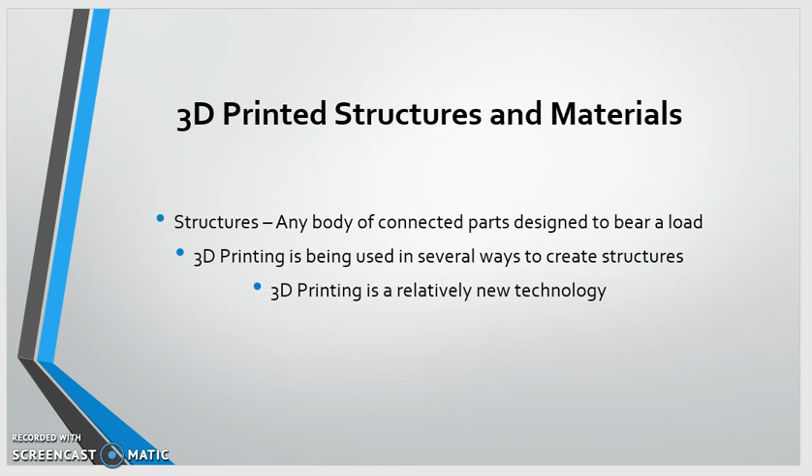The topic we have chosen to detail through research is advances in 3D printed structures and materials. In this report, you will learn about several different ways existing additive manufacturing processes are being used to create structures. 3D printing is a fairly new technology compared to traditional manufacturing techniques, but access to technology has allowed this field to grow rapidly in comparison.

In order to talk about how advanced printing of structures is accomplished and what materials are being used, it's important to define how traditional printing is accomplished. A design is made, processed into a file format handled by a printer, and printed using processes such as selective laser sintering or fused deposition modeling. The main constraint of these technologies is that in most cases it's confined to the inside of a relatively small printing machine, which limits the size of what can actually be made.

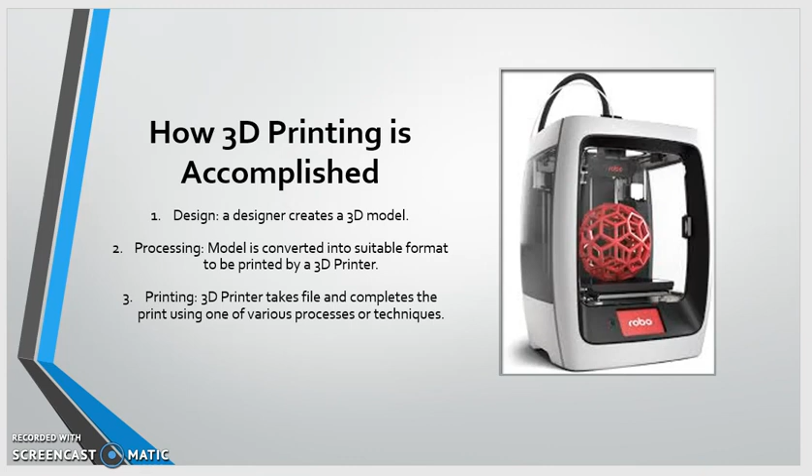To highlight advances in 3D printing and the materials used in their processes, we looked at three examples of where 3D printing is being used to create structures, each with different materials. The first deals with metal structures, the second with concrete structures, and the third with polymer-based structures.

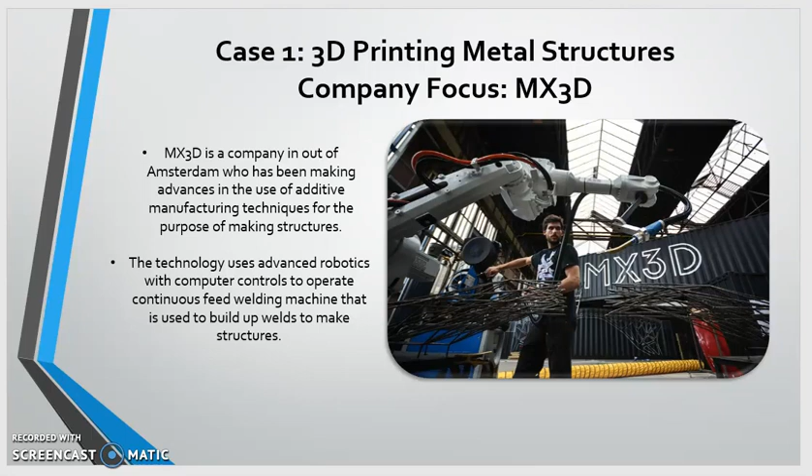In case 1, we researched a company called MX3D out of Amsterdam. They have made huge advances in additive manufacturing through advanced robotics with integrated computer controls to operate a steady feed welding machine that continually builds up welds to create 3D load-bearing structures. Their major project is the construction of a bridge spanning a 12-meter gap across a canal in Amsterdam, pictured above. One notable observation is that the geometry of what they're able to print is almost organic in form, a departure from traditional I-beam construction.

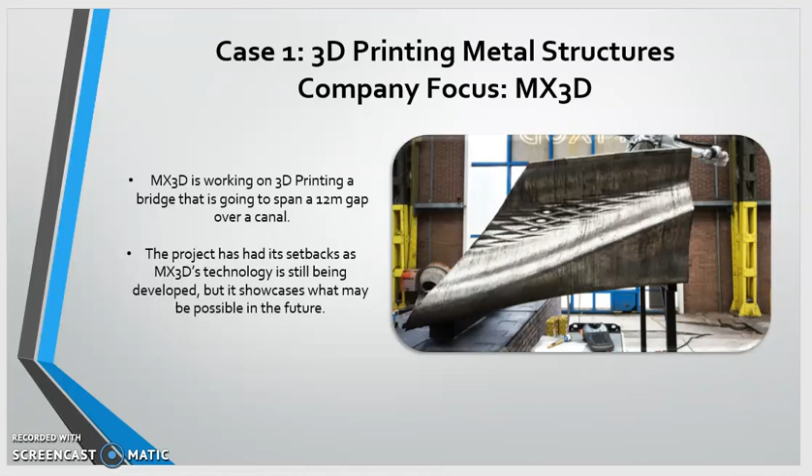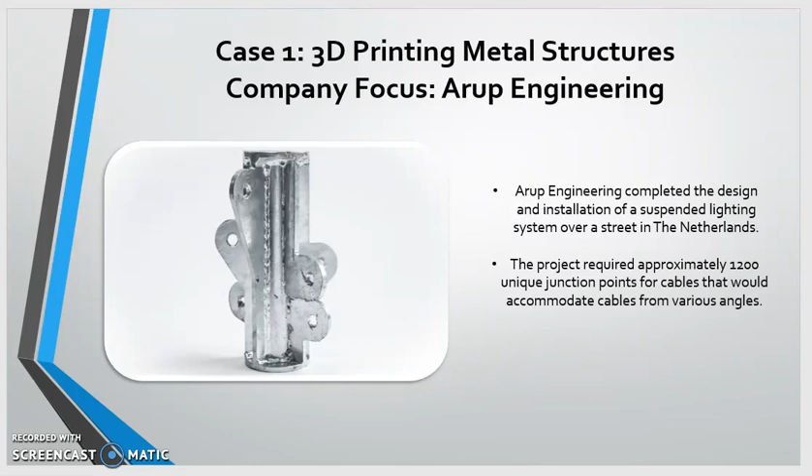Another case of metal being used in new ways in the printing process can be seen in a research paper by Arup Engineering. Arup completed the design and installation of a suspended lighting system over a busy outdoor shopping center. Numerous cables were used to hang lighting structures, requiring 1,600 cable junctions, 1,200 of which had slightly different dimensions to accommodate cables at different angles. Arup investigated how 3D printing could streamline the creation of these 1,200 unique junction points.

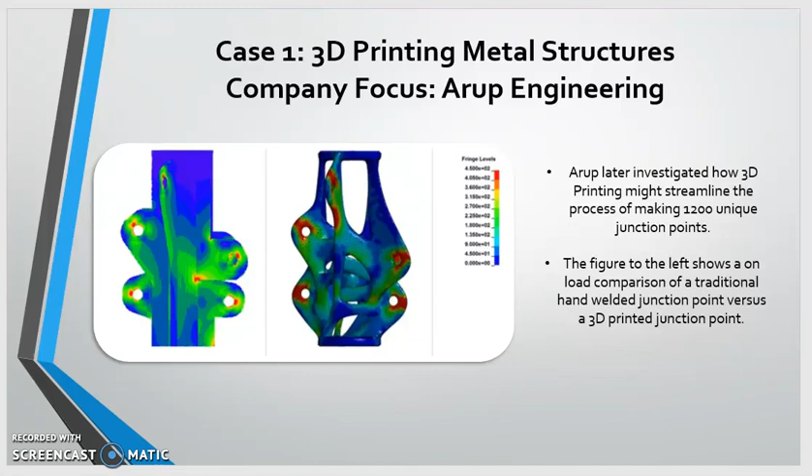They found that an additive manufacturing process, in this case selective laser sintering, could be used to create these junction points, as an alternative to welding them by hand. This also allowed them to depart from traditional geometries, as seen with MX3D, dramatically reducing the material needed for components while maintaining structural integrity. Again, the designs lend to a more organic form than we're accustomed to seeing. The accompanying figure shows a load comparison of the traditional junction point versus the proposed 3D printed version, both sufficient for the job.

What Arup found was that through the use of additive manufacturing, they would be able to create these pieces. However, the cost saved on labor at the time would not offset the high cost of 3D printing, so it was not truly a viable alternative.

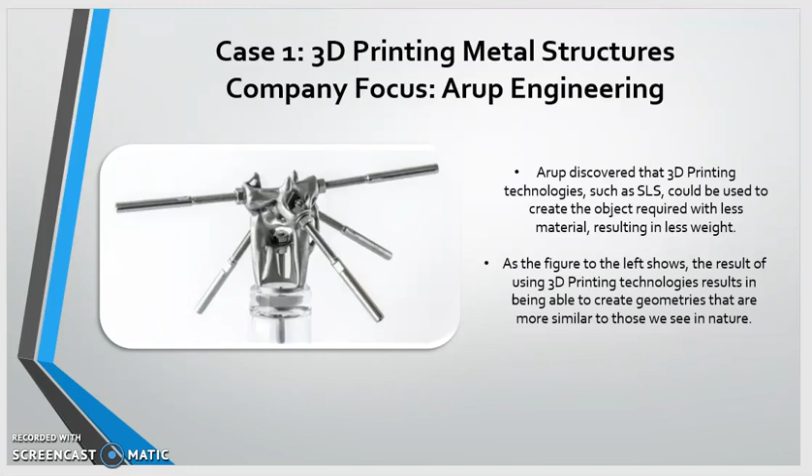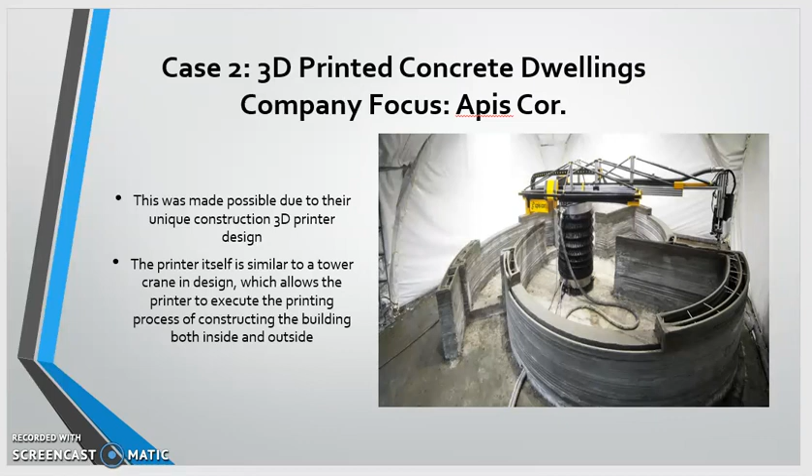The 3D printing construction of entire buildings on site is made possible only through Apis Cor's unique construction 3D printer design. The printer is similar to a tower crane, allowing it to execute the printing process of constructing both the inside and outside walls simultaneously. It has an operating range of approximately 132 square meters, and unlike the block printing method, does not require a completely flat surface to start construction. The printer also produces no waste materials.

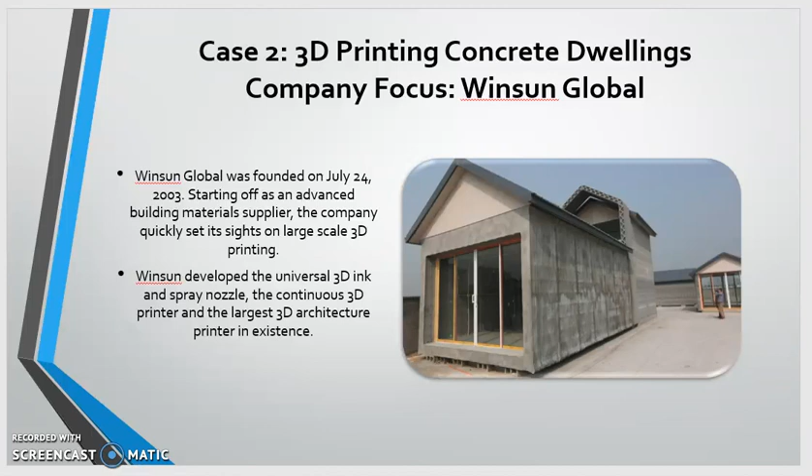Winsun Global is another company making tremendous strides in the field of 3D printing construction. They are pioneers in the industry, holding more than 100 different unique patents. Their most important invention is the first 3D ink and spray nozzle, the tool that made 3D printing with materials like cement possible. They also possess the world's largest 3D architecture printer.

Winsun has already created several impressive projects, the first being the printing of 10 residential homes in less than 24 hours, and the most recent being the construction of an entire office complex in Dubai.

The building process starts with a design made with a CAD system. The design is then uploaded to the printer in the factory, where it begins making walls. The walls are then shipped to the building location, where they are promptly installed and reinforced.

Walls are made with a spray nozzle, which adds materials in layers. Layers can be between 0.6 centimeters and 3 centimeters thick. They're made with a special ink comprised of cement, sand, fiber, and a proprietary additive.

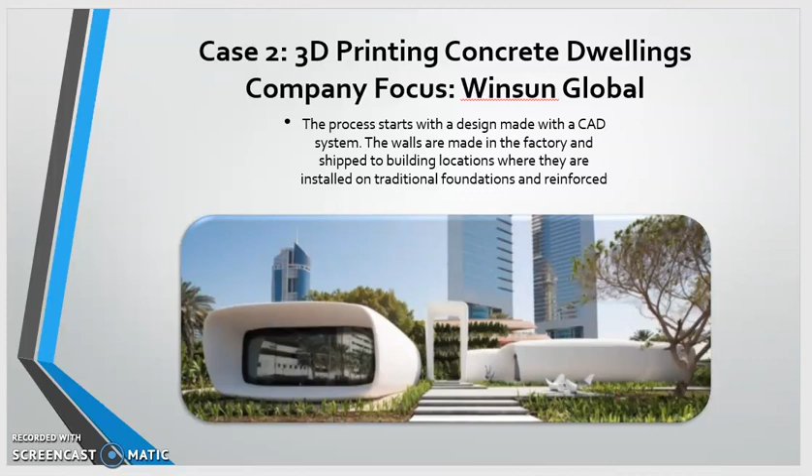Branch Technology is an example of a company using a fused deposition modeling type of 3D printing to create structures out of polymers. In reality, it is a robotic arm that will be used in the automotive industry on an assembly line, fitted with an extruder head.

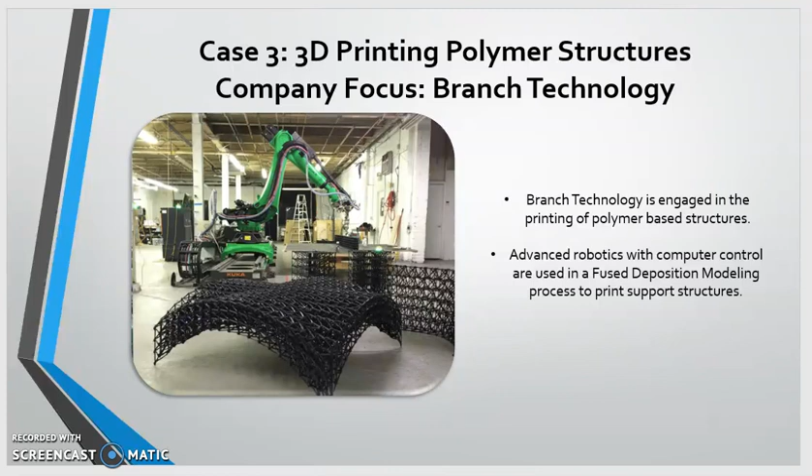The polymer exits the nozzle in liquid form and quickly solidifies to create the 3D geometry. Structures are created based on computer software guidelines set in place by the designer. This software instructs the extruder head to take the correct path.

Branch Technology is currently developing new ways to use 3D printing on construction sites. One application they envision for the future is using 3D printed structures to reinforce load-bearing walls.

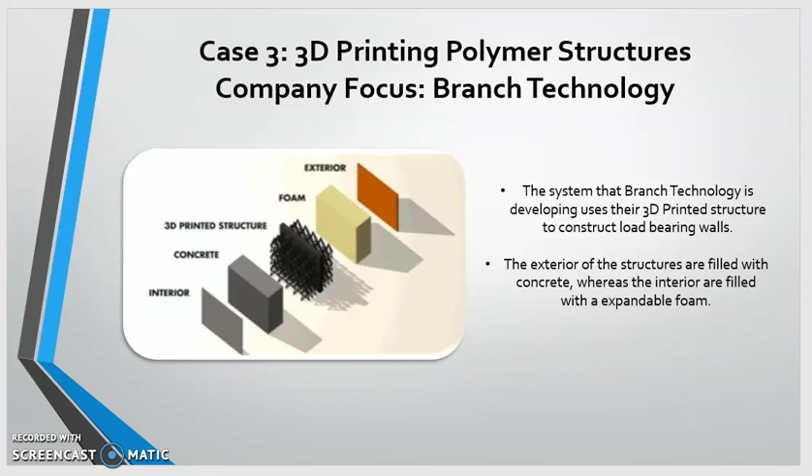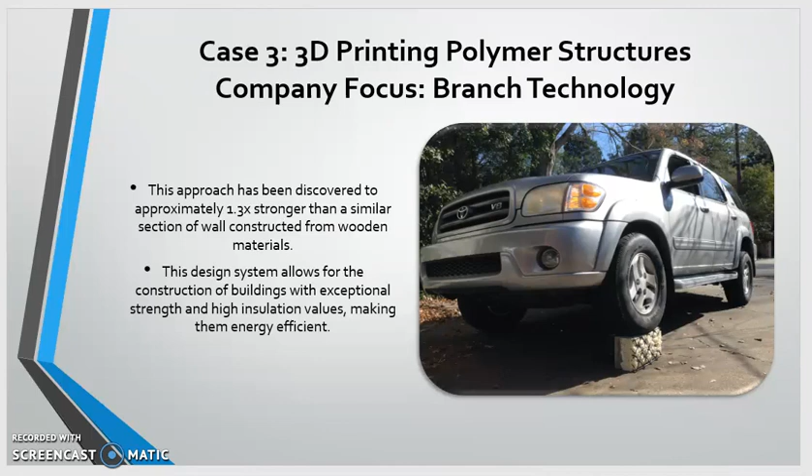The exterior of the structures are filled with concrete, whereas the interior is filled with expandable foam. This design approach has been discovered to be 1.3 times stronger than a similar section of wall created from wooden materials. Similarly, this design system allows for construction of buildings with exceptional structural integrity as well as high insulation properties, making them energy efficient.

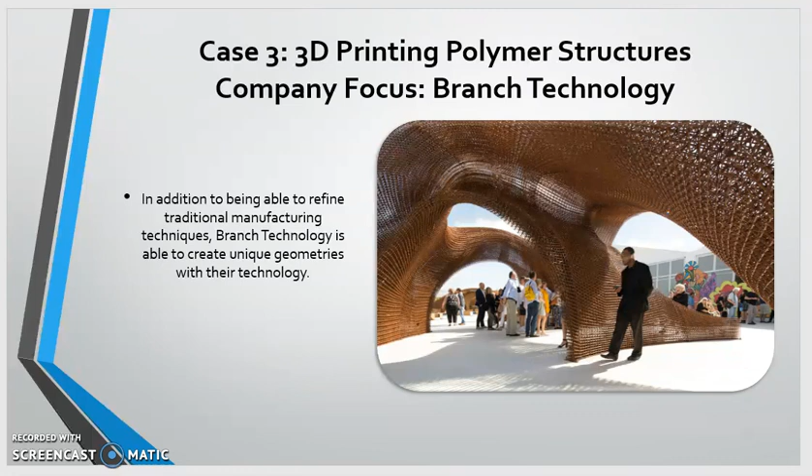While 3D printing is able to refine traditional manufacturing techniques, Branch Technology is also able to create unique geometries with their technology, such as curves and natural shapes. An example of this is the centerpiece in a pavilion in Miami.

In conclusion, we have seen that there have been considerable advancements in the field of 3D printed structures in the past 10 years. Although these advances use common materials, they are doing so in new and unique ways never seen before, allowing things to be printed outside of the box.

We project that for the next 5 to 10 years, 3D printing of structures will continue to build momentum. However, given that most of the techniques being used are relatively new, we do not believe that they will be considered viable alternatives to traditional techniques, with the exception of 3D printing cement structures.

3D printing cement structures is already proving to be cost-effective. Apis Cor estimates that they could construct a square building with an area of 38 square meters for $223 per square meter, including all exterior and interior furnishings.

Winsun's 3D printed office building was also extremely cost-effective. It is estimated that by using Winsun's technology, savings of approximately 80% on construction costs and 60% on labor costs were seen, and overall construction waste was reduced by 60%.